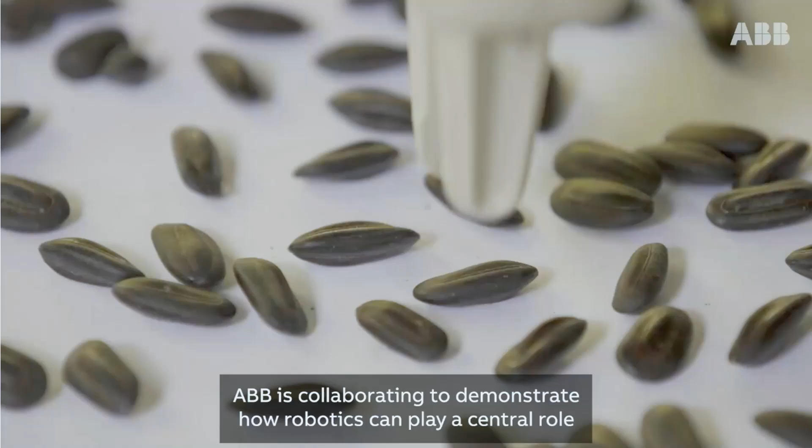Jungle Keepers works in Peru. We're protecting the rainforest. We've been working on a reforestation program to be able to patch up the areas that we're losing. ABB is collaborating to demonstrate how robotics can play a central role in sustainable transformation in our world. In Robot Studio, users have the possibility to create projects from scratch. It's then possible to share it, even in the Amazon rainforest.

A very nice story. The most remote robot in the jungle of Amazon in Peru, helping a great NGO, Jungle Keepers, to reforest the Amazon. This NGO sees and understands that technology can only help them to accelerate and get better to their vision to save the planet. But why is it relevant for us here on an industrial fair? Well, what made this possible are a combination of key technologies that we have developed to unlock many possibilities.

We have our collaborative robot Yumi that you know for many years that can work side by side with people without the need of much infrastructure. Yumi was powered by solar power in the remote jungle, okay? So it was connected through satellite due to its communication features to the cloud.

So through the Robot Studio software that you've seen, engineers on the other side of the world, in Sweden in this case, could help design the program to pick and place the seeds, to have all these seeds prepared. We can plant 6 football stadiums in a day, okay? So you have collaborative robotics, you have cloud technology, you have software for simulation.

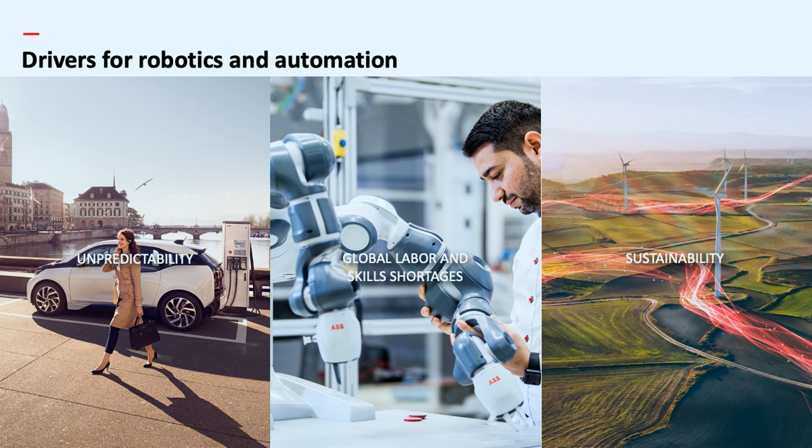Why is this relevant? Well, these technologies are relevant because as we see, the drivers where robotics support are becoming even more important, even more challenging, and we're striving to offer the best flexible architecture to tackle all these problems through our solutions. If you take unpredictability, from a business standpoint, from a political standpoint, things are not as they used to be, predictable and simple. From geopolitics to trade compliance, to pandemics, to shortages, to supply chain shocks, to technology advancement. When you decide to invest in a product, build a factory, automate it, you have much less certainty what's going to happen than in the past.

And our customers are telling us we need to have an architecture that can cope with constant change. Production ramp up, production ramp down, diversifying products, the different delivery channels to the market. All this is very dynamic. And if you have rigid automation, then your CapEx is trapped there. It is constrained. You need to have the next level of flexible automation. And we are striving, as you will see, to deliver a portfolio to be able to build these things with hardware and software.

At the same time, centrally, labor shortage is becoming more and more a key central challenge for companies here in Europe, very much, but also in Japan, in most of the advanced economies. Even China has now started to decline in population. So there is no solution. While we've been talking about productivity gains with our customers for years, we now just talk about being able to produce or not, because simply the people are not there. In the US alone, in 2025, there are going to be 400,000 welders lacking in the nation, just to give you an example. And you know the millions of unfilled positions we're going to have in this continent by 2030. So tackling this with automation that is easier to adopt by medium and small companies, easy to integrate, is one big part of the efforts you will see we are striving for.

And finally, sustainability—not only the example from Amazon, but many other examples in our portfolio, like pixel paint, where we're drastically reducing waste and energy consumption when painting cars, 3D printing with recycled plastic, and supporting compostable packaging companies to eliminate single-use plastic. All these things are becoming a real business priority on the agenda of the companies we're trying to help with the most advanced robotic automation.

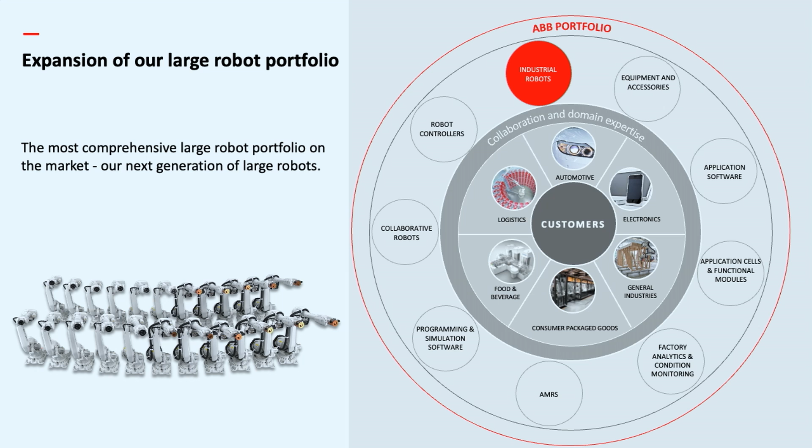The first one is our brand new large robot family. I would say humbly but proudly that this is really a fantastic piece of engineering—the launch of 22 variants of robots, truly a modular exercise. If modular engineering has a meaning, you can see it in this family of robots, where we have all the sizes of reach and payload to really complement any application. This can be seen in this chart, where with the families from 5700 up to the new 6700 that you can see on the booth, we are covering payloads from 70 kilos to 310, and reaches from 2.3 to 3.2 meters. If you look at the chart, at every level of payload and reach we have a straight line of products covering seamlessly all the different possibilities.

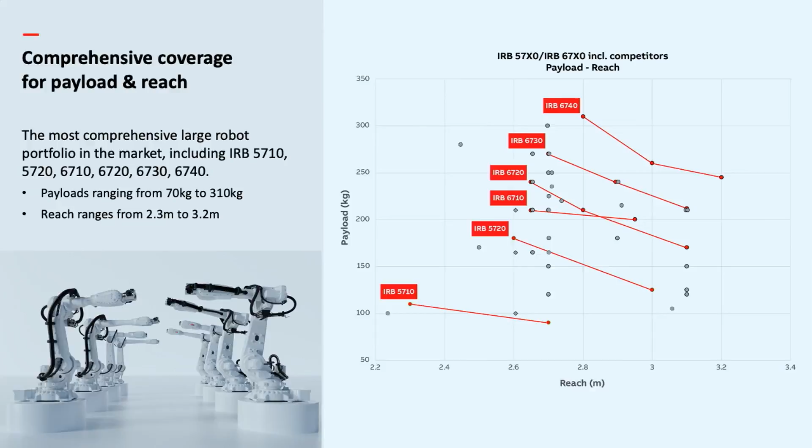Uncertainty means that I don't know how my next product is going to be, so I don't know how to design it, and what type of robot I'm going to need becomes more difficult. That's why you need this density, and you get this density through modular design—so you have all these 22 variants. Jörg Reger, the managing director of Automotive, will talk much more in depth about this new family of robots.

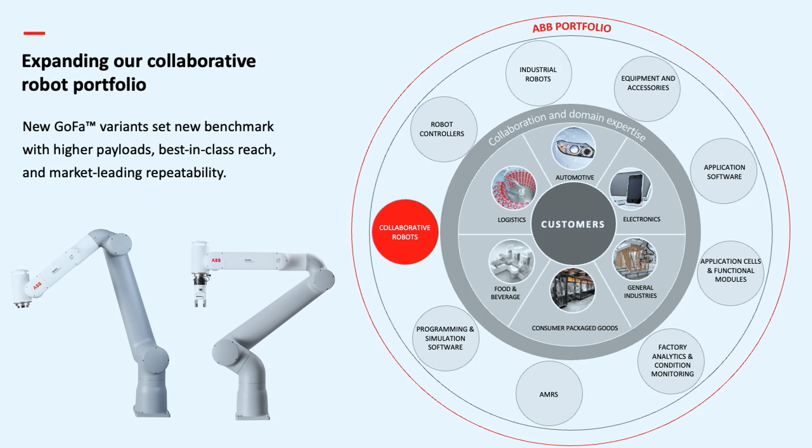Then we have our expanded family of GoFas. You've known Yumi for a long time, and it still does amazing things. And you've known GOFA, which we launched more than a year ago, where GOFA really set new standards for power and force limitation, lead-through programming, and accuracy. Now we're applying this for longer range, longer payload robots that you will see. These robots are designed to be best in class when it comes to the trade-off of reach and payload. They are slim, sleek, and can reach as far as any other cobot in their size class with the highest payload. Katja will talk about this, and also about something we're building around the collaborative robots—an ecosystem, a program where we're partnering with end effector and process equipment companies, so we have pre-packaged process kits that let people easily implement cobots.

Then we have our mobile robots. Many of you have asked me why ABB Robotics is going into mobile robotics, and there's only one reason: flexibility. Customers tell us, look, the world is so uncertain that I cannot invest in one fixed line after another without knowing if the product will really succeed. Why not come out with an architecture where you break down the lines into smaller cells and connect them with AMRs, so I have more flexibility to use my factory?

No matter what the production has to be, I can use all my assets all the time at a high level. That's why we believe mobile robots have to be at the core of the new and future-looking flexible automation, flexible architecture of factories. And as it couldn't be any different, if we get into a segment or a product like ABB, we want to advance technology.

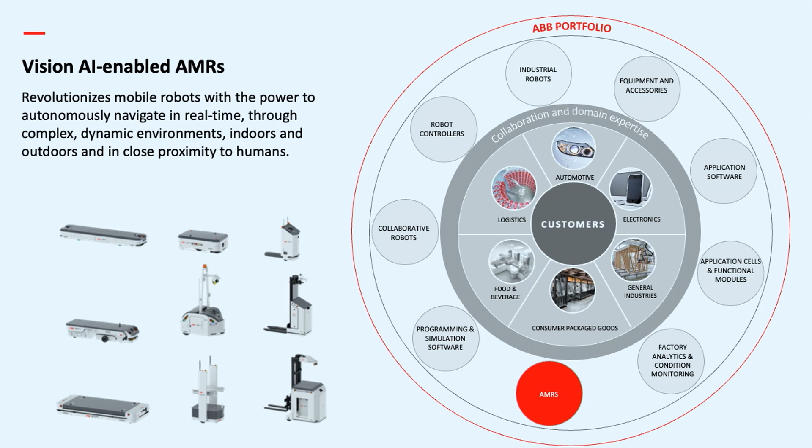And this we have done very far, introducing the most advanced navigation technology, called Visual SLAM. SLAM stands for simultaneous localization and mapping, and it's the process for the mobile robot to understand where it is in a map, so then it can take missions to go from A to B.

That traditionally has been done with magnetic tape lines. That is a lean and reliable system, but it's not flexible. Flexibility was advanced with laser sensors, a 2D laser, but that has a lot of limitations.

So now we are pushing boundaries, introducing 3D cameras where we get the full scene so we can have a more robust map. And of course, since you have all the images, you can apply machine learning, artificial intelligence, and develop a lot of new features. Let's look at a video of what we've done with a customer already.

AMRs to move pallets, to put crates in a warehouse environment. In this case, we're installing four 3D stereo cameras and a very powerful GPU. As you see with the camera, we are pointing at many dots. Every green dot is validated by the system as a valid point of reference for the map.

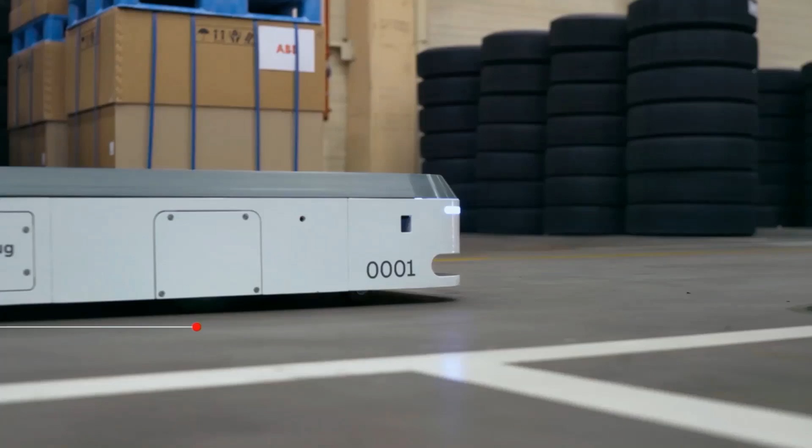Imagine the difference if you would have a 2D laser scanner at one height. In such an environment, you would see a black line. It's a tire warehouse, so it would get lost. It did actually get lost. The same would happen in an aisle of a hospital.

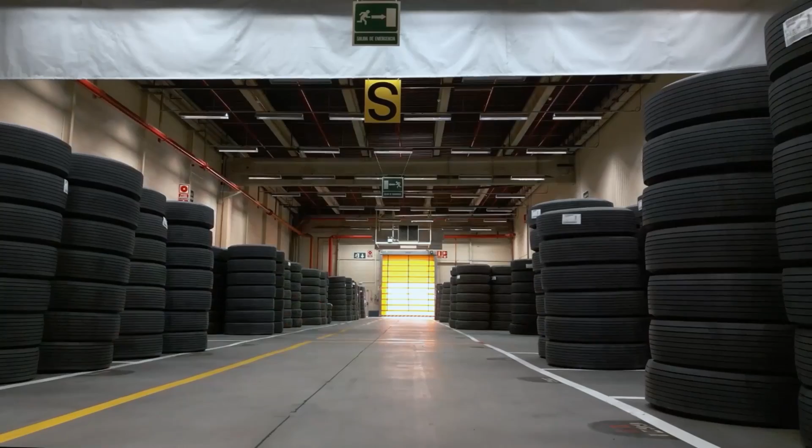At the same time, a warehouse is a very dynamic environment. One day you have a pallet, then it's not there. So you need to continuously be mapping, referencing to the column, referencing to scratches on the floor. And at the same time, anything an AMR learns, it deploys to the whole fleet. So there is this collective real-time intelligence where the map is updated and shared across the fleet of AMRs. You've got the most comprehensive and resilient map with all these features.

And because you have the images, you can also teach the system to understand that a pallet is a pallet and it does not move, that a person might move, so you have better obstacle avoidance, and many more things to come. All right, so we talk about industrial robots, cobots, mobile robots, and the software advancements in there.

But what's the glue that puts all that together? It's the software layer, because the hardware on its own does not allow you to ideate. So the first thing, of course, is allowing our customers to imagine, and that's, again, RobotStudio.

Our software suite, which has been a very well-known and praised offline design tool. But now, because of the cloud functionality I alluded to in the YuMi video, we can extend this design feature to real time.

Because once you've done a program and a simulation, that stays in the cloud, and the customer that has the physical installation and the system integrator can keep a dialogue about optimizing it, saying 'can you improve that?' You don't need to go around with hard stuff.

So then RobotStudio is helping to implement that, and because of the cloud sharing of the projects, now the customer can continuously call the integrator or do it themselves to look and optimize. This optimization part, not only on design but in the lifetime of the installation, is super important from a productivity standpoint, an energy consumption standpoint, or a quality standpoint.

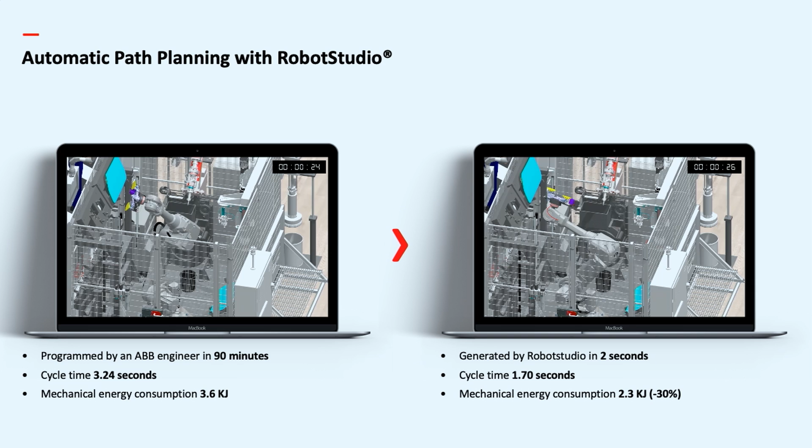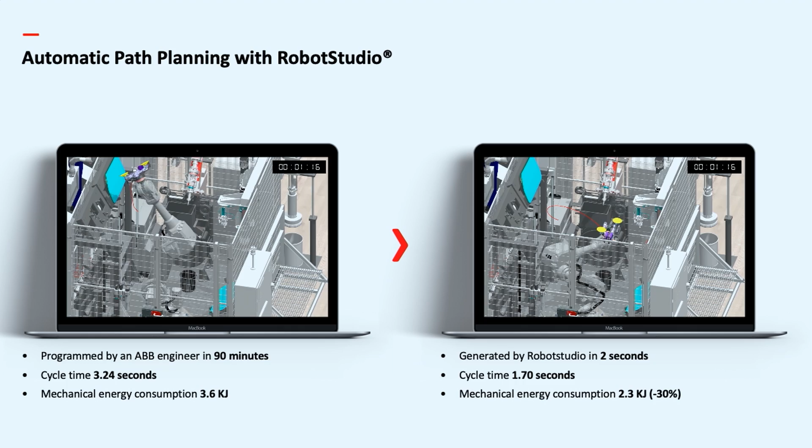You also get a bonus, because logically, a shorter path means you spend less energy. So in this case, we optimized the energy from 3.6 kilojoules down to 2.3. And 80% of the CO2 emissions of robots happen in the installation, 20% in production.

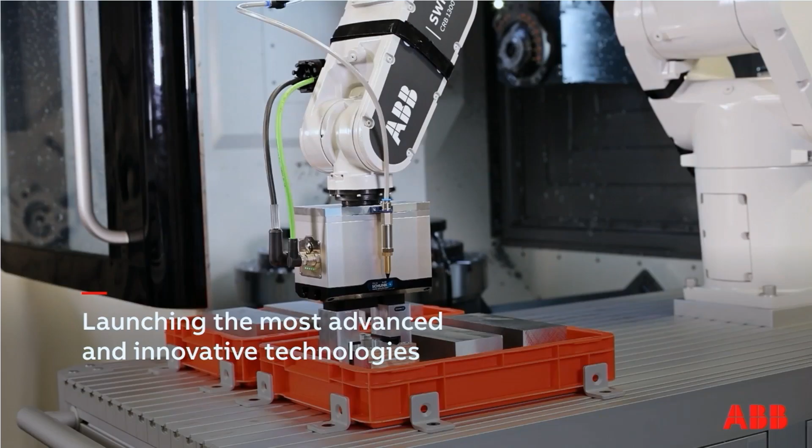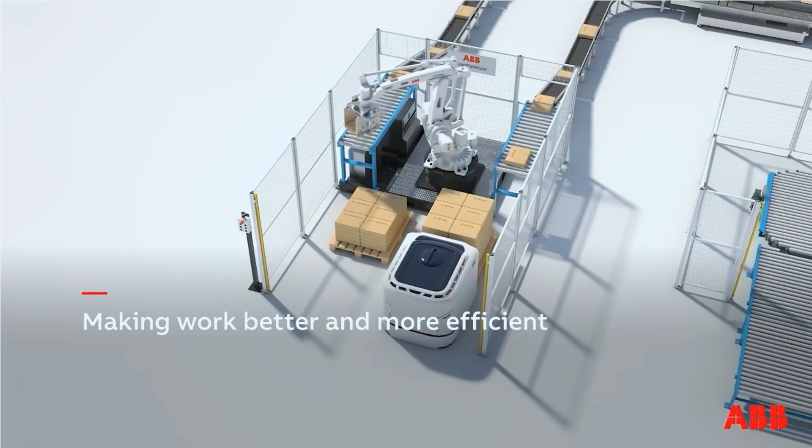So you can imagine how impactful this digital advanced tool can be for productivity and sustainability. At ABB, our mission is to offer technology that helps our customers improve society and improve their productivity - from picking robots for logistics, to pixel paint that customizes cars while saving energy and paint, logistics applications with robots, artificial intelligence, mobile robotics, and also, very importantly, the way we do it and why we do it.

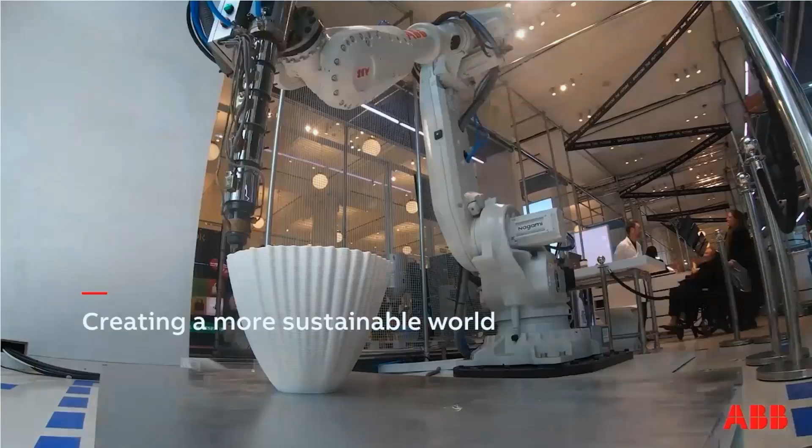That's how I'm going to end. Because at ABB, it's as important what we offer our customers as how we do it and why we do it for our customers. And that's all around driving for a better world - recycling plastics from the ocean to print objects in a department store in London could be an example.

So all in all, today at Automatica we continue our journey to develop products - large robots, cobots, AMRs, artificial intelligence, navigation, software suites - so customers and the community can really develop the best possible solutions to thrive in productivity and sustainability. Thank you very much.

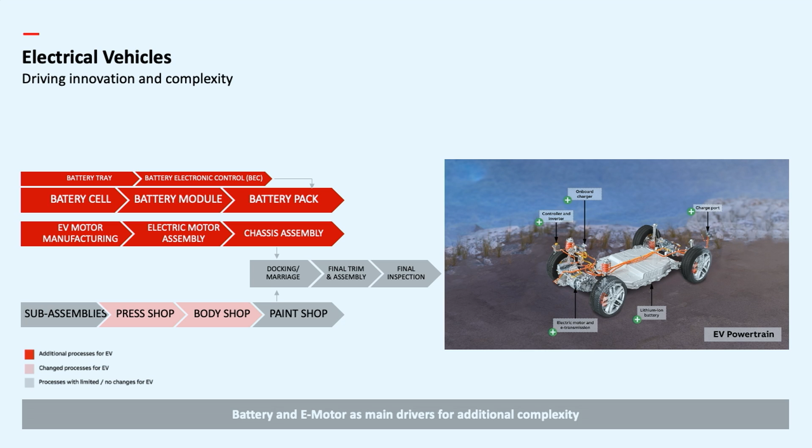And that's also influencing the chassis. And then we see the third area. Recently, we also see new things coming up, driven by the e-mobility drivers. These new companies started directly with producing e-cars, like Tesla or BYD. They are saying having less parts for the pure car body to build it and make the parts bigger, but having less, make it more simple to assemble. And there we have mega casting and mega pressing ongoing. So a very big demand is ongoing in the market by this e-mobility. And of course, we have also other areas, as Mark said, in other industries.

And exactly at that time, we have the great pleasure and the honor to launch a new robot family here at the Automatica this week. And you are actually one of the people who have a little bit the privilege to see the launch video. I would like to start with that now.

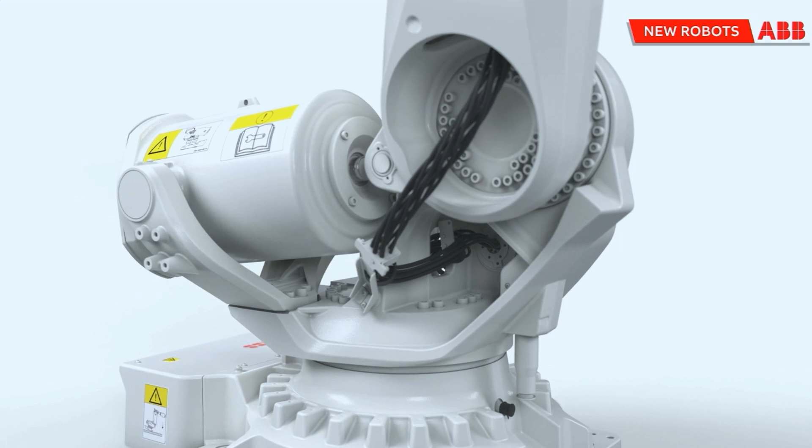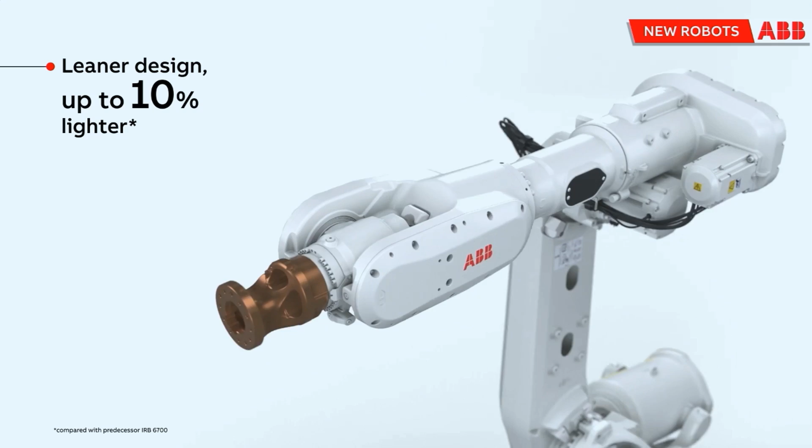A new family of complete robots, and as Mark said, modular built, so that we have the option for the future to keep the flexibility on the modular base. And when we are talking about the 4 families, it is our 6700 robots, and we reduced the weight by 10% with this new design.

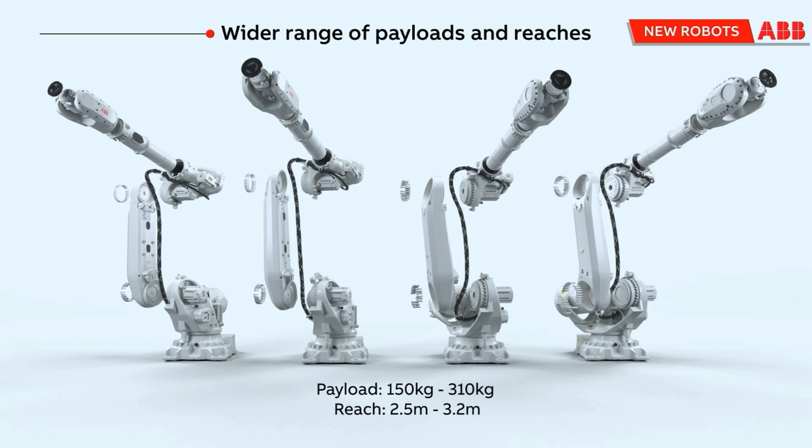You see, 4 powerful robot family, 6710 up to 6740, and the payload 150 to 310 kilo, and reachability also 2.5 to 3.2 meter, which is really best in class.

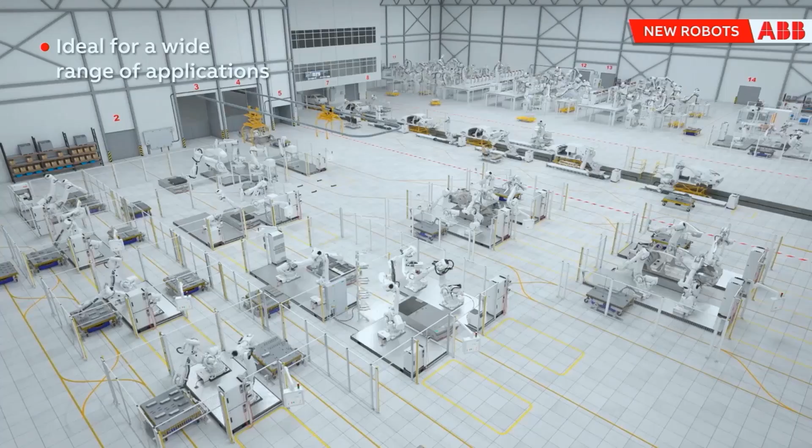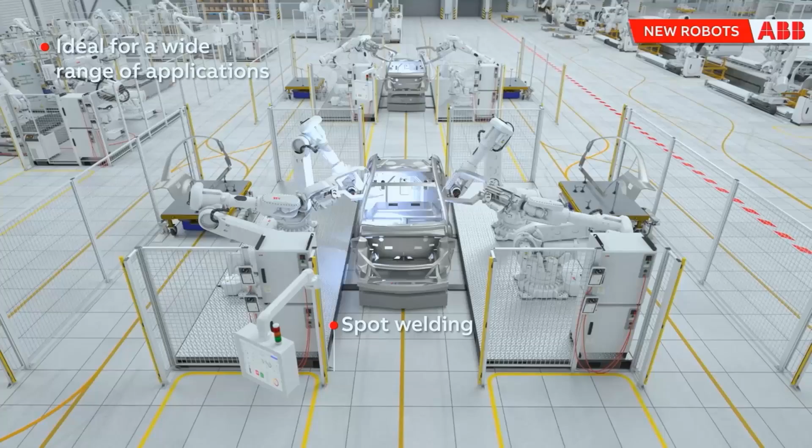And there you see, 22 powerful robots are coming into the market, and we are not only a robot supplier, as Mark said, we are putting applications on the robots and building such production cells, high standardized production cells for different applications, for high precision assembly you can see here, and then you can see here spot welding, and we have many applications, a very wide range.

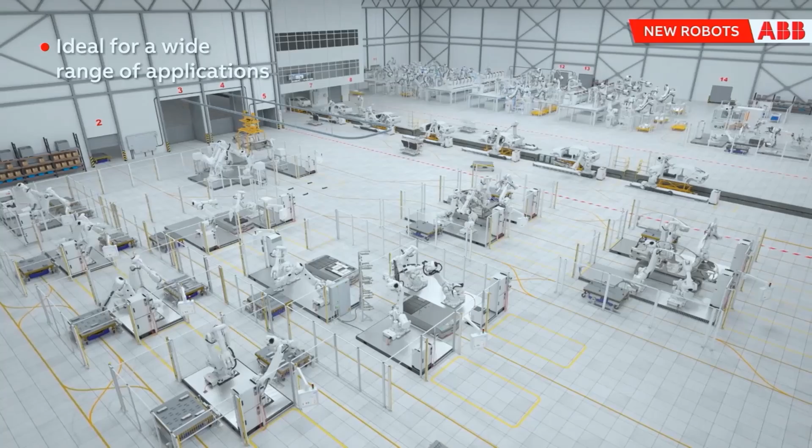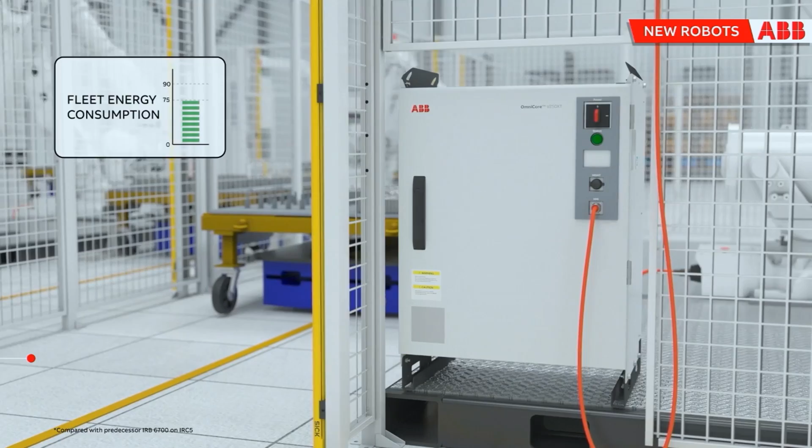And then when we are talking about flexible automation, what we already heard from Mark is, now we are putting a very flexible transport system into this holistic approach. It's the AMR. We don't have the fixed conveyor technology anymore. We have really autonomous driving vehicles, and that makes the whole line super flexible. You can easily put a cell in and a cell out because the AMR can easily change the path, no problem at all. And this is this overall holistic concept we are driving, not only for automotive, also for other industries where we are doing manufacturing.

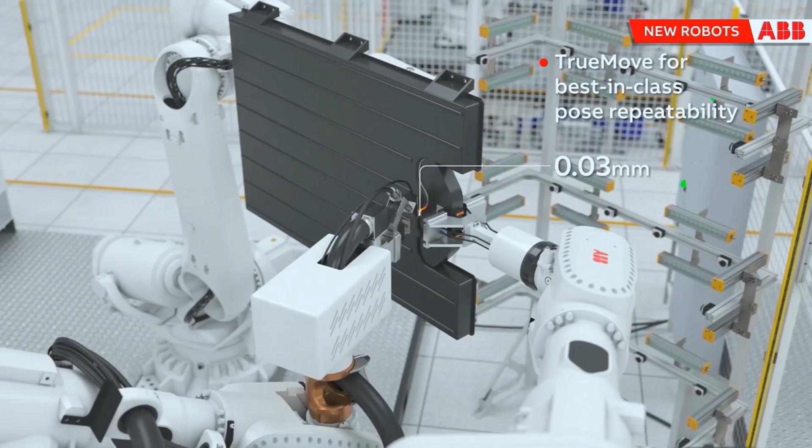And then, as you see here, we have also for all applications really software in place, TrueMove for example, to support the repeatability. In some areas you have seen for the spot welding, the spot weld software. So also for the applications we are developing software to support the quality of the end product.

And then the lean aspect is that on the robot we have a harness, very compact and designed for that, which is reducing the swinging and the friction, so that the programmer can easily program very freely because there is no problem with the DressPack later on.

Okay, and don't forget you can also look virtual on it. And I hope you are also impressed a little bit by that, as we are, and having the great pleasure to make it here on the Automatica.

And let me summarize, so what is important: 22 large high-performing robots, it's the 6-7 family, and we are of course supporting the EV trends, what I just explained, but also other industries. And then we have some remarkable performance topics. One is the wide range of payload, 150 to 310 kilo, and the reachability 2.5 to 3.2 meter.

And then I would say when it comes to repeatability, we are best in class. We can say we are really on a good level now, 0.03 millimeters. And then also on the speed, the outstanding cycle time, we are at 3.86 seconds due to our new OmniCore controller driving the robot. And then what is also a last highlight I want to put is, and I already said it, reducing the weight, and we also enhanced the brake system. We were able to reduce the energy of the robot and the controller by 20%, so also driving here sustainability.

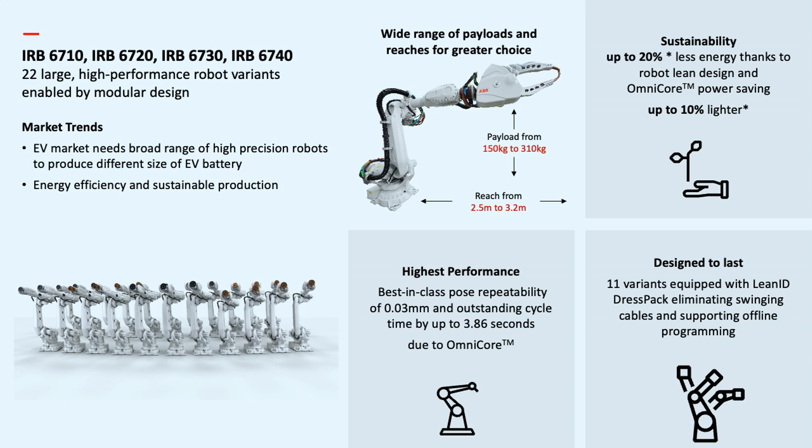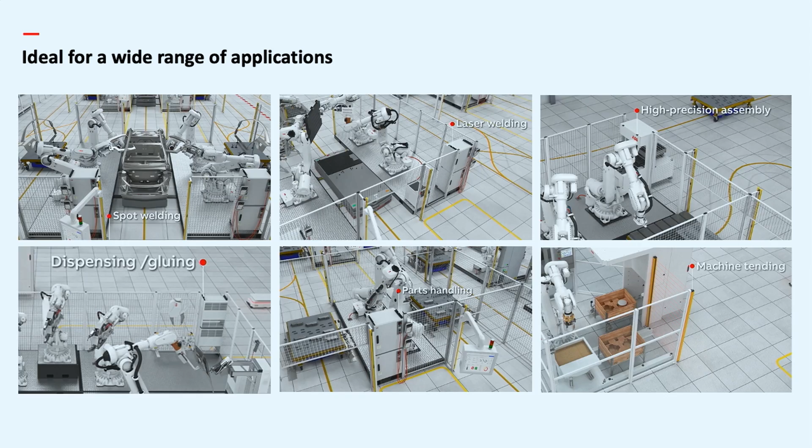And then, as said, we are putting the robot on applications, and then we are building these high standardized application cells. We have seen many of them in the video. And then we are putting it together to flexible automation.

That is what we are driving when we talk about flexible automation: combining highly standardized production cells with a very flexible transport system, the AMRs, the autonomous mobile robots. There we see fleet management becoming more and more important for this holistic approach. You can easily and fast scale up and down, because you can put cells in and out. If you want a gluing application, you can put a cell in, and the AMR just takes a path further to reach this new production cell.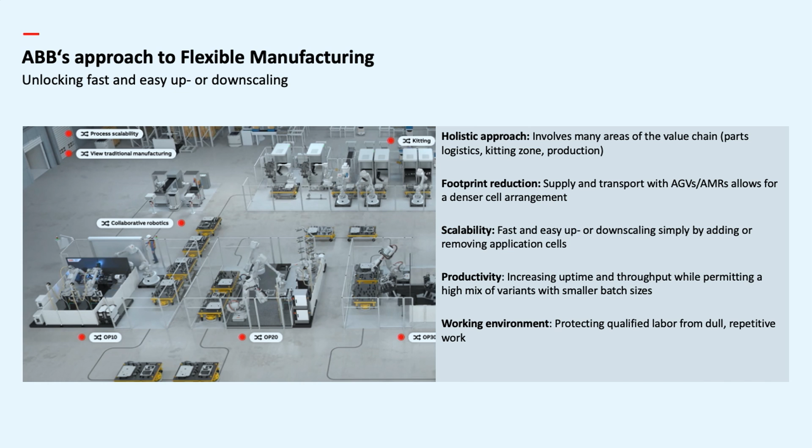On productivity, I want to highlight one thing: the high mix of variants. Imagine on one AMR we have parts for type B. It comes to the cell, the laser scans it, and we produce type B. On the next AMR, we have parts for type C. The scanner reads it, the program changes in the production cell, and we switch to the next type. So it's really possible to achieve a high mix of variants while keeping a fantastic output of the line.

And with that, I'm coming to my end, and I want to invite you all to please visit our booth. There you can see this holistic approach, this flexible manufacturing concept, to get a better idea. We've built it up as an EV battery tray manufacturing solution.

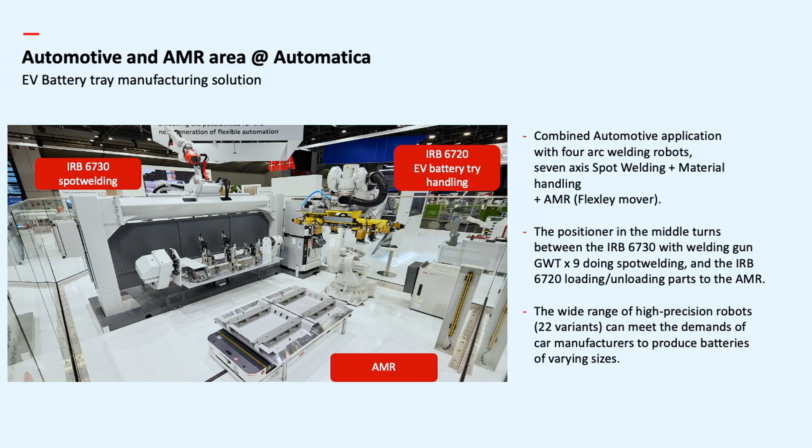You can really see the AMRs transporting the parts to the production unit, and then we have a robot putting the parts in. On the other side, we have the production area where one of our new robots is doing the spot welding. Many thanks for your attention, and I hope to see many of you at our booth in the next couple of days. Big thanks, thank you.

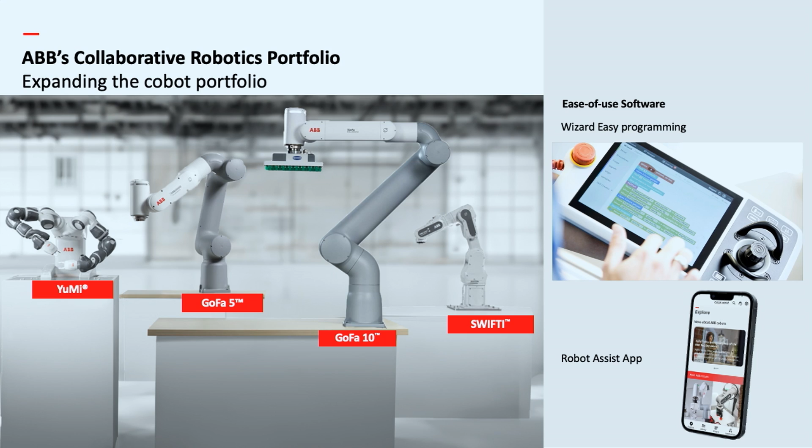Last but not least, what we heard before is that having hardware in the portfolio is one thing, but it's equally important to have easy-to-use software as well. In this case, the Wizard Easy Programming is a very nice interface where you can drag and drop and easily create programs in a very intuitive way. Then there's the Robot Assist app, where you can control the robot or super easily find datasheets or any information you need.

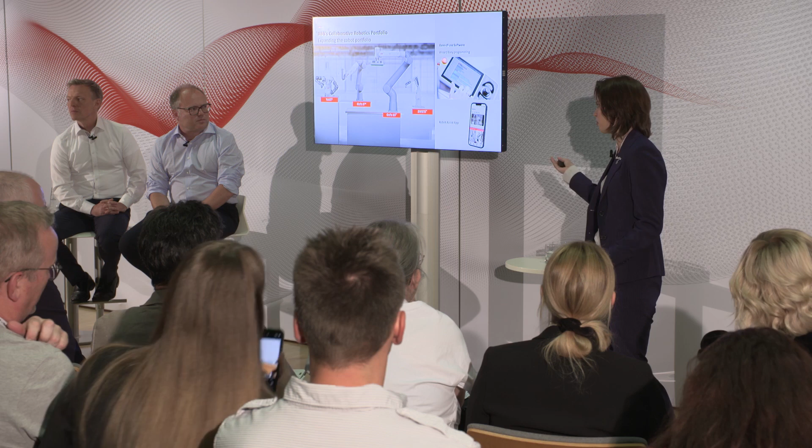It's a very diverse portfolio we have as ABB, and I think that's what we see here with the cobots. We see that cobots are a very big, growing part of the industrial robots market. The question is, why is it growing so fast? Earlier we heard from Mark that there's a very big unpredictability in the market, and at the end we need to be able to react fast to this.

But it's not just us, at the end it's really our customers. That's why, especially if we want to address a diverse segment of new customers, like first-time users, small and mid-sized companies actually starting with automation, it needs to be ease of use. That's the key thing. It also needs to be safe. That's something we always need to keep in mind, but it's something that's actually taken as a given, that it needs to be there.

Then we heard about unpredictability. This also requires a lot of flexibility, and here we see that cobots are really a great answer for this, because at the end you can create very lean solutions. You can quickly change, for example, the place of the cobot. So with this lean approach, you can really react flexibly, and combining it with ease of use, really everyone is able to adapt it to their needs.

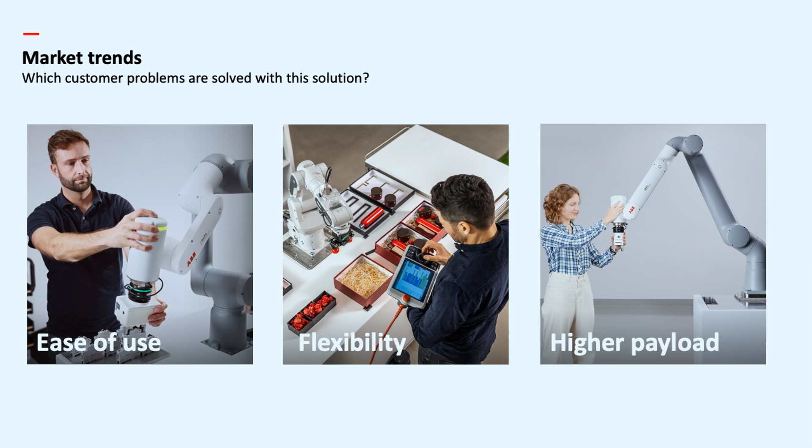So, the market for cobots is growing, and we see another very important trend: higher payload, and coming with this, also longer reach. The payload up to 12 kilos is a very big growing segment, as is reach of more than 1 meter. And here I can proudly introduce our two new variants: the GOFA 10 and the GOFA 12.

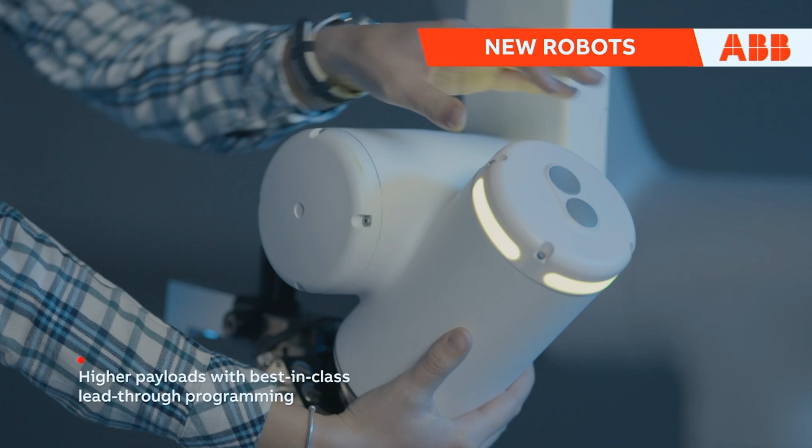You see the very high repeatability. You see the ease of use.

If you look at the 2 new variants, the GOFA 10 with 10 kilo payload, the GOFA 12 with 12 kilo payload, I think it has a really remarkable repeatability of 0.02 millimeters. And that's really a new benchmark in the industry.

We see a lot of applications where you actually have the need to be super precise, because otherwise you cannot really automate these new applications.

Then when we talk about having the repeatable robot, you can easily program it. At the end, everyone is also asking for productivity. And that's where the tool center point speed of 2 meters per second is actually very important, so you can create really productive applications with it.

If we look at the GOFA 10, it has actually a reach of 1.62 meters. And this really allows to, for example, do the palletizing of US pallets. So the reach is longer than every comparable Cobot in this class.

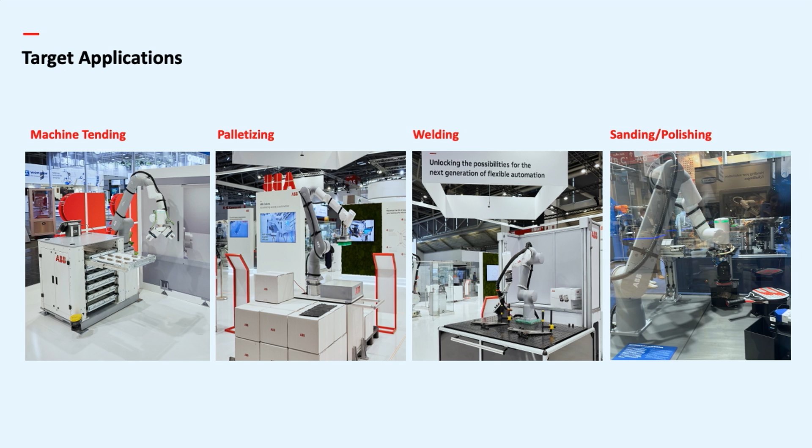And then at one of our partner booths, you can also find one of the GOFA 12 in a polishing application, because also here we see a big demand.

We also have a digital LinkedIn Live coming up in 2 days. So if you're online and cannot join us at the real booth, I can invite you to the digital version. We will show you around and explain a little bit in detail. So that's a great opportunity.

And then we've seen that there are new Cobots. But at the end, if you look at applications, we need more, because in every application, you need some gripper, some feeder, anything around to really make it an application.

And here, for this, we launched 1 week ago a new program. So that's the ABB Ecosystem Program, and it enables partners to actually develop ease-of-use packages for hardware, like grippers and feeders, but also for technologically advanced software functionalities. So this should be really integrated. And we said it's a program to enable partners.

So how could this look like? For example, when we have one of the camera suppliers, we really work together closely in the development phase to make sure we have deep integration for our Cobots and industrial robots. So they started with RobotStudio, prepared everything virtually. Then they came to our lab, really worked in the Cobot Experience Hub. And at the end, you can go to our booth and see it in action.

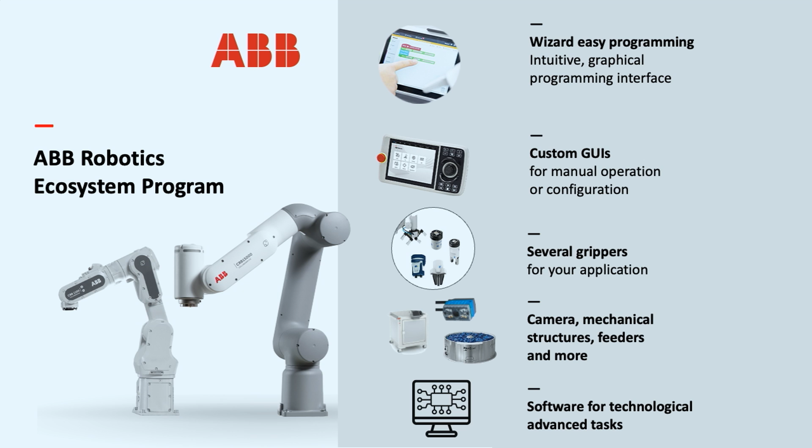We heard there's a lot needed, so you can see that actually these packages work together. There are wizard-easy programming blocks included to easily, for example, program a gripper or a camera. Sometimes a very customized graphical user interface is needed, and of course it can be hardware and software packages.

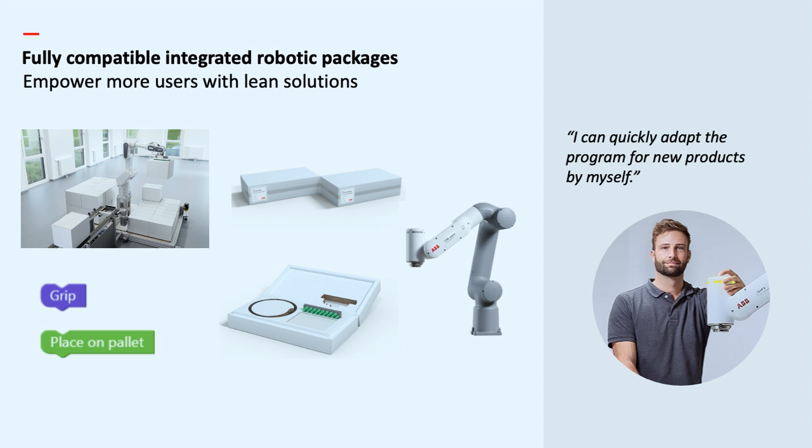I always like to have one example, and here we can see a palletizing example. What would you need to make it really a lean application? You need a GOFA, or another Cobot, SWIFTI could be another option. And then you need a gripper and, for example, a lift kit. And at the end, that's it. You put it together. You can program it in wizard-easy programming because you have the blocks coming from the partner packages, and at the end the user can either directly program or at least adjust the program depending on his preference.

So that's basically also the question, who's really profiting from these packages? And that's what we see in end users. They can program a simple pick and place application easily, or system integrators do the setup, and then you can simply adjust it. I think we have a really great example at our booth, because you can see one of the big industrial robots also with wizard-easy programming. So sometimes small adjustments is the thing the end users want to do.

Then, of course, system integrators and a new group of Cobot experts. We have a long history working with partners, and they also really profit from these packages. Why? Because at the end we enable them to do these lean applications, because it's saving them a lot of time, it's reducing the risk a lot, and that's when they are actually able to go into this market and realize a lot more projects, these lean applications. Last but not least, of course, the ecosystem partners also profit from it, because together we can really reach a new market.

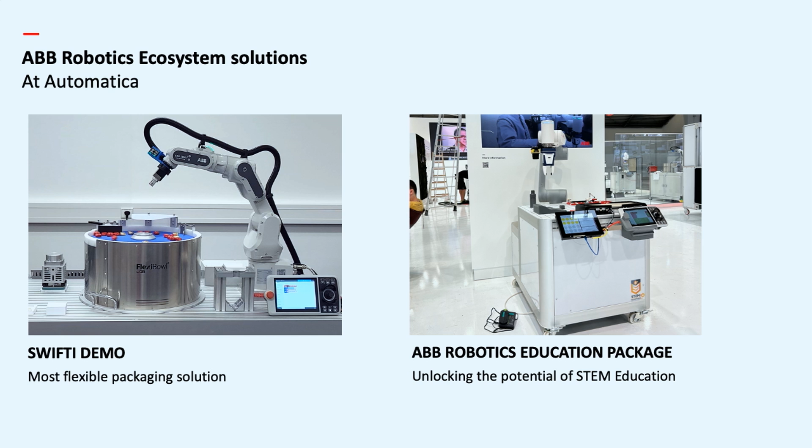And then I can also invite you here. We have this demo of the SWIFTI, where we have really a lot of ecosystem packages together. So we have, for example, a desk from one company, the feeder from another company, the camera, the gripper, the cable holder, everything just together in one cell, and it's fully programmed in wizard-easy programming. So you can go there, have a look. And for the online audience, we will also show it in the LinkedIn Live.

Last but not least, also universities, schools, the whole education segment is profiting from this, because at the end we have one education cell, and here also the gripper packages basically provided from one of our partners, really easy to use, no need to do anything extra. So that's where we really bring everything together, the cobots on one hand, but then also the ecosystem making the full applications possible.